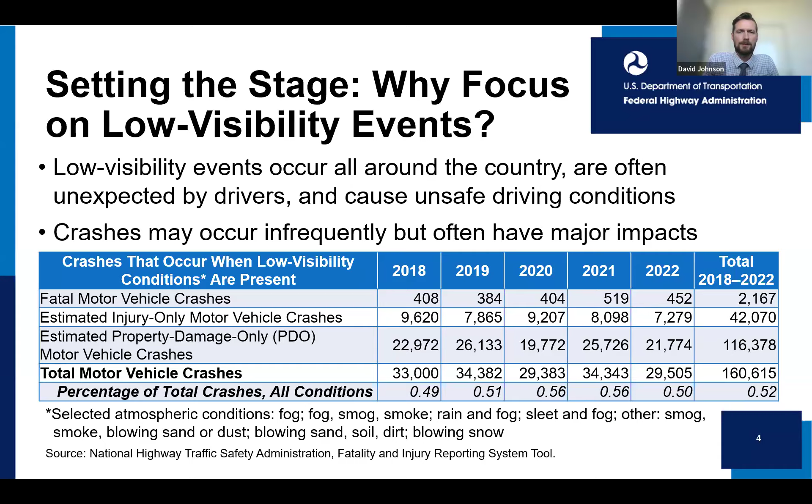Setting the stage, some of the recent high impact, low visibility events that I mentioned earlier: on May 1st, there was a localized dust storm in Illinois. This is an interesting case because it speaks to the different types of low visibility events, not just what you think of with fog or smog or smoke. In this case, it was a localized dust storm in Illinois, caused by farmland, freshly tilled and planted, in coordination with wind gusts of 35 to 45 miles an hour.

That dry tilled ground was picked up by high gusts of wind, and that blew dust across I-55, causing a 72 vehicle crash, which involved multiple fatalities and injuries. The National Weather Service has a webpage that discusses the atmospheric and meteorological aspects of that event, so if you're interested, you can take a look at that link.

Also, more recent was the October 23rd, 2023 super fog event in Louisiana. This was caused by a mixture of wildfire smoke and fog, calling it smog or super fog. This resulted in a 168 vehicle crash on I-55 with multiple fatalities and injuries. The National Weather Service also has an interesting webpage there if you want to take a look at some of the scientific atmospheric details of why the event occurred.

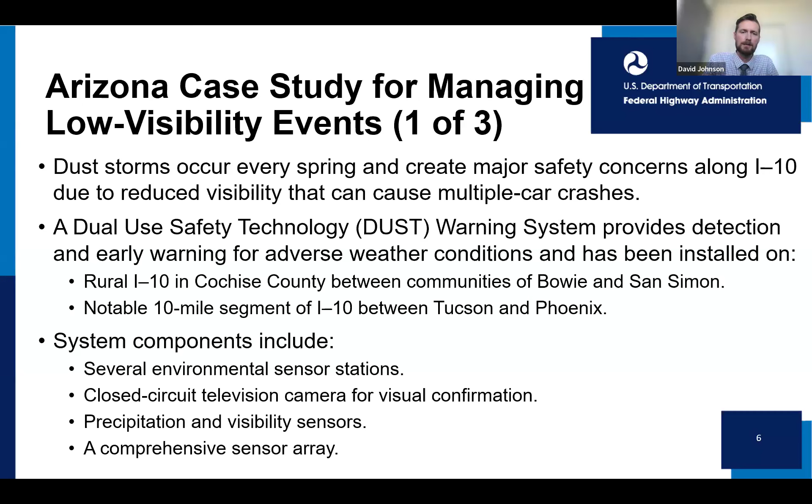The system was installed on I-10 between Bowie and San Simon, as well as a 10-mile segment of I-10 between Tucson and Phoenix. Some of the system components, which several of our speakers will also be talking about, include installation of environmental sensor stations, or ESS. They also use closed circuit television cameras for ground truthing and visual confirmation of the event, and installed precipitation and visibility sensors at that site as well. Next slide, please.

This is a little bit more detail, and you can kind of see some of the ITS and other technology advancements they use for this system. They've used programmable logic controllers that automatically trigger devices due to wind speed or minimum visibility threshold. This is an automatic system that will display dynamic message signs and messaging to the public so that they're aware that there's low visibility due to dust up ahead.

They also use highway advisory radio services that can be used to alert drivers if they're listening to the radio, with stored messages that they use. The sensors also send out email alerts to a certain group to alert highway ops, as well as law enforcement, of high winds and low visibility conditions.

And then there's also variable speed limit signs that are used, staggered through the 10-mile stretch, to help drivers slow down and be prepared for low visibility up ahead.

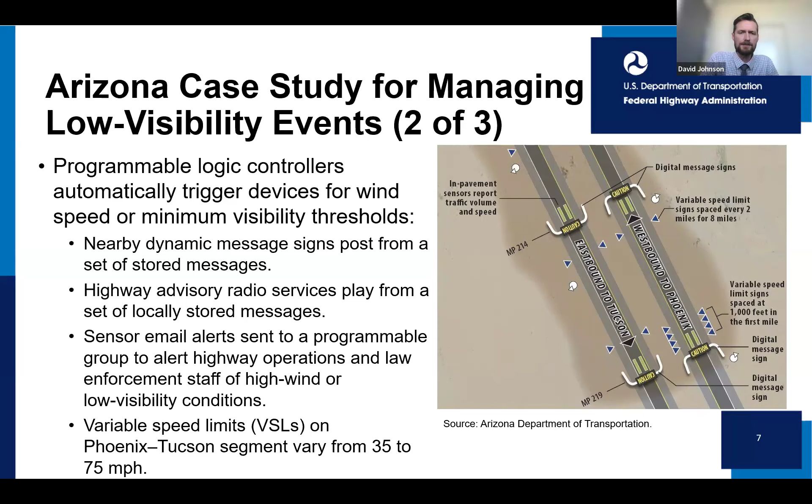Next slide, please. We do have a really good fact sheet on our webpage that goes into a lot more detail on this system. It's a really interesting piece. It was also highlighted in Public Roads, and there's been international attention to the dust detection system. So if you have any interest in something like this, take a look at our webpage at the link below.

Some of the challenges and lessons learned that Arizona DOT wanted to communicate was the initial calibration, as with any sort of sensors or ITS deployment, can be a bit of a challenge. So setting up trigger points for when parameters are triggered, such as with dynamic message signs, but also the atmospheric conditions that need to be triggered for VSL thresholds, as well as email notifications and alerts.

It was a challenge with meaningful review of weather, crash, and system performance data to validate the system, as well as providing things like benefit cost analysis. That's typically very challenging with these types of deployments because both weather events and crashes can be highly random.

And then also the focus on highway segments where there's recurring issues. These dust storms and low visibility events obviously don't fit into set boundaries. They can happen any place, anytime. So it's difficult to figure out exactly where on interstates or highways a system like this would need to be used. Obviously, you want to use data - you want to look at recurring crashes and intensities and frequencies when you decide to deploy something like this. But those are some of the challenges that Arizona pointed out in that fact sheet.

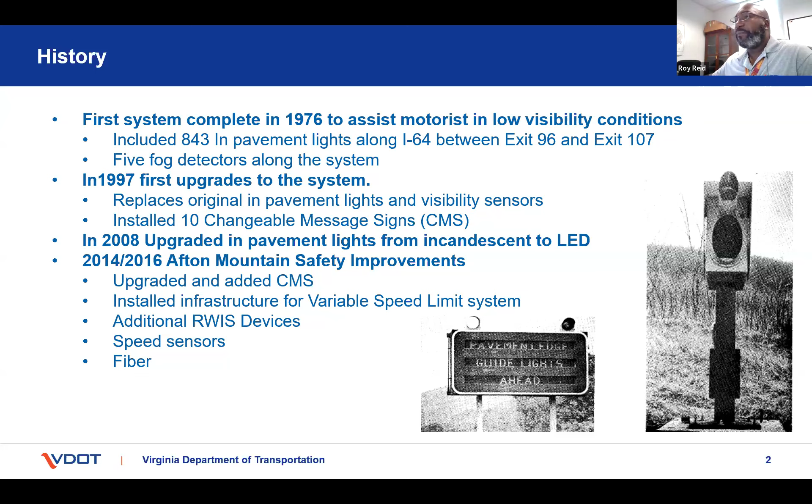So what we currently have out there, we have RWIS devices across Afton Mountain, at 8 different locations, along with 14 message signs, CMSs, that are dedicated to Afton Mountain messaging.

Let me back up a quick second. So where our RWIS devices or stations are,

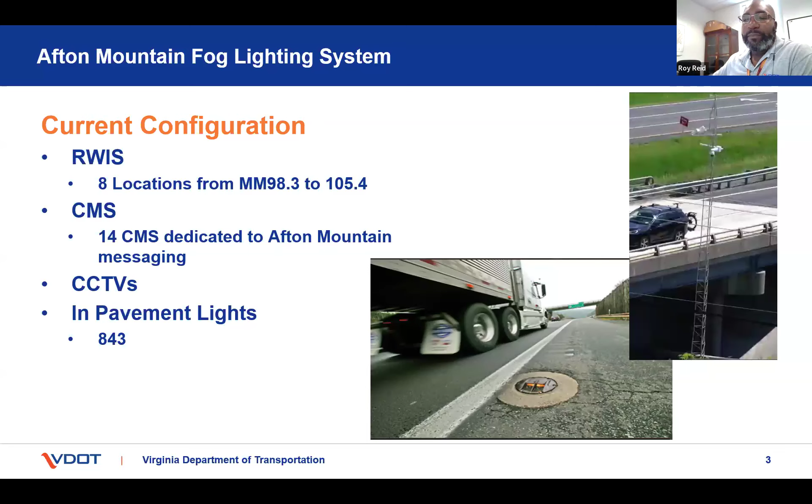This is basically to give you an idea, a view of what we have. So right now, this depicts some of our message signs, along with our camera locations, our weather sensor locations,

and also this is simulating a severe fog event. So if you were to dig into this and look at it, you would see our messaging for dense fog on the mountain, use caution on our feeder signs, and then our interstate signs, basically, it says dense fog, reduce speed.

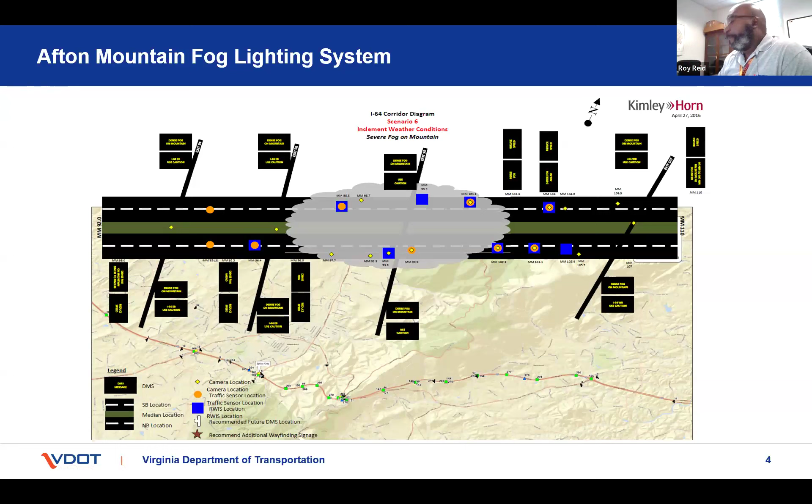So how do we utilize our system? Our RWIS devices on Afton Mountain communicate directly into the TOC. What will happen is as your visibility sensors are reading, getting their visibility, we reach certain thresholds and that will trigger an alert into the Traffic Operations Center.

The TOC operators will in turn take those alerts, and then they will launch an incident response plan based on the visibility level. So as you can see here, minor is 1,201 to 1,400 feet. And anything above 1,400 feet of visibility, we call that clear.

And then so with our minor, they activate just the lights, a response plan to activate the lights. And if fog conditions continue to degrade, then it would change based on the conditions.

So if it's between 500 and 1,200 feet visibility, then they'll do a moderate fog condition plan, or major if it's between 200 and 500, or severe if it's less than 200 feet of visibility.

One of the other things that we tend to deal with out here, I'll show you our matrix, is high winds on Afton Mountain. So we have common occurrences of winds that are consistently greater than 30 miles an hour. In those cases, we will post high winds on mountain, use caution.

And then freezing fog. We've had several occasions of fog, especially as we get into the winter months, October, November, where we'll have temperatures that are 30 degrees or less, and we also have fog conditions. So as you can see in this matrix, we would post a message that says black ice possible.

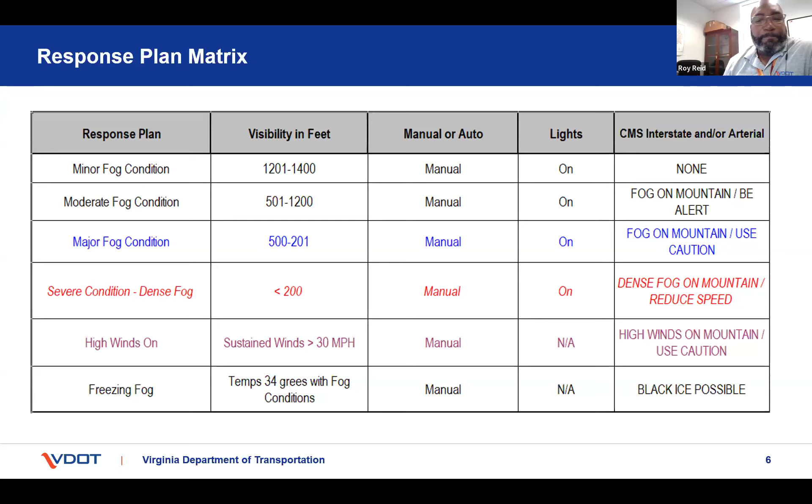But another thing that our operators would do for this is that they would in turn make notifications to our area headquarters, and so we would have people respond to the interstate and treat the roadway as necessary. So that is what I have to talk to you about on Afton Mountain.

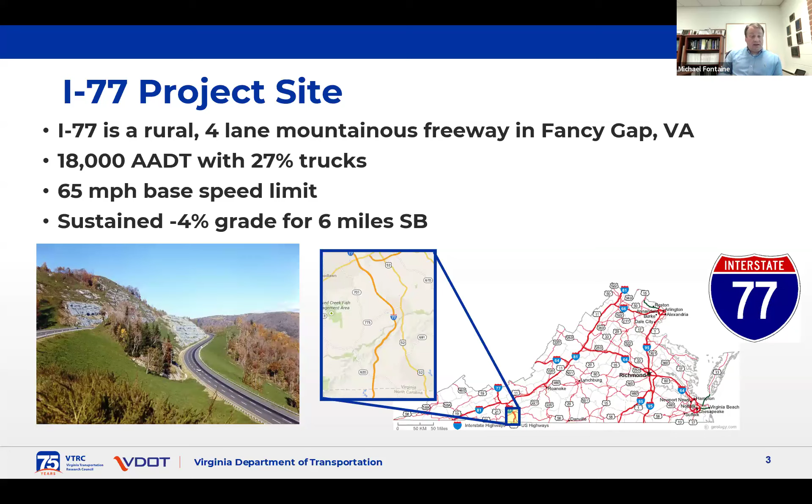On the left side of the slide, you can see a picture taken about 50 years ago when the road first opened up. The other thing you can notice is we're basically hugging the side of a mountain as we go through this corridor, and sometimes we have pretty significant differences in elevation between the northbound and southbound direction. So it's not strictly a case where both directions of travel are parallel to one another.

This corridor has had a lot of concerns for a long time where very frequent dense fog will come into the corridor and really impair visibility. This has been a long-standing problem, so we've had a lot of visibility sensors deployed out there for some time. In fact, when we looked at the historic average, somewhere in the first 15 miles of I-77 coming into Virginia has fog an average of the equivalent of 29 days a year. So we're talking about an area with a lot of fog, very predictable and recurring.

Even though fog doesn't always come on a schedule, we know it's going to happen in this location. Because of the fog combined with the high truck traffic and the steep downhill grade, we had a lot of problems with chain reaction rear end crashes during these very severe visibility events.

Probably the most recent one that generated a lot of concern, leading to the project I'm talking about today, was an Easter Sunday crash in 2013. That was a 95-car crash event with 3 fatalities. When you talk to the troopers that responded, they said that if you were standing at the back of the tractor trailer involved in the crash, you could not see its cab. The fog was so thick.

In the meantime, our VDOT folks in the Traffic Operations Center were able to look at the speeds. People were still going 70 miles an hour on the highway with that kind of impaired visibility.

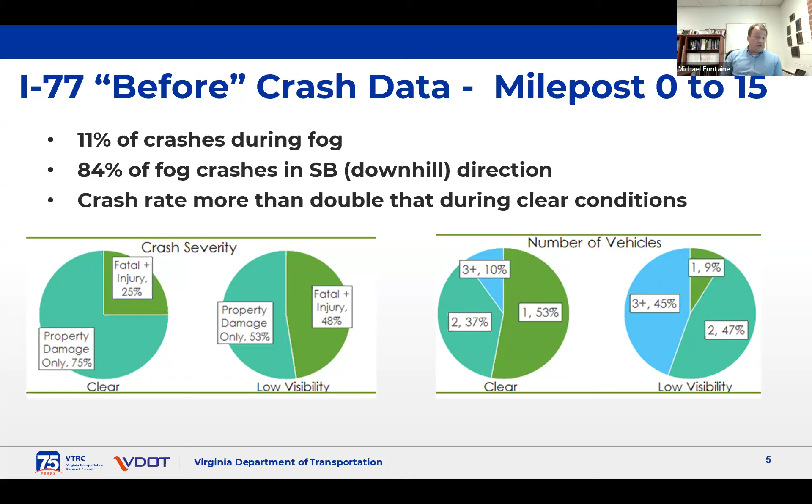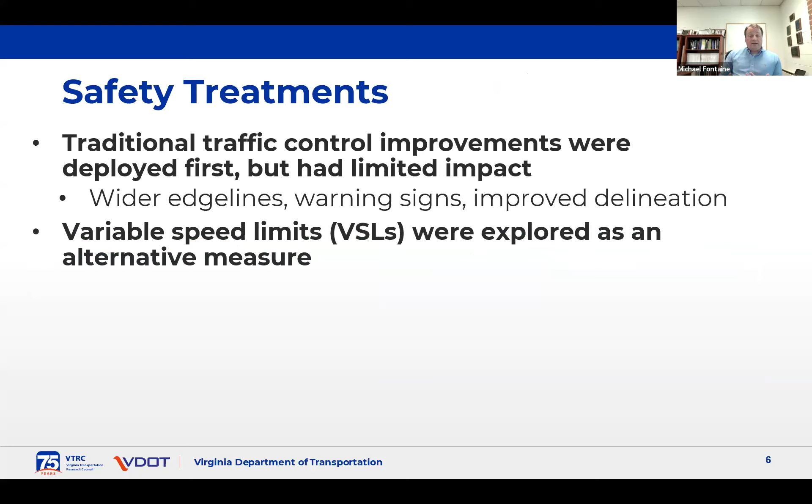So because of all these problems, VDOT initially tried traditional traffic control improvements to deal with this. We tried wider edge lines, larger warning signs, improved delineation, and despite all that, we weren't really able to move the needle much in terms of safety. Because of that, VDOT became interested in looking at variable speed limits as an alternative means to control speeds in the corridor and hopefully improve safety.

Just a few logistical things we need to do: normally when you're setting a speed limit, you do a speed study that's signed and sealed by the district traffic engineer doing the study. In our case, since we're not setting a specific speed limit, we're defining an algorithm for changing the speed. That algorithm has to be signed and sealed for each deployment of variable speed limits in this state, with the district traffic engineer approving the logic being used to change these speed limits.

In Virginia, our variable speed limits can be regulatory or advisory, so we do have that option. One thing important to mention is that right now in Virginia, we can only use automated speed enforcement in work zones and school zones, so it is not a tool for us on a regular section of freeway. The variable speed limits we put in for this fog system had to be manually enforced traditionally; we could not rely on automated speed enforcement here.

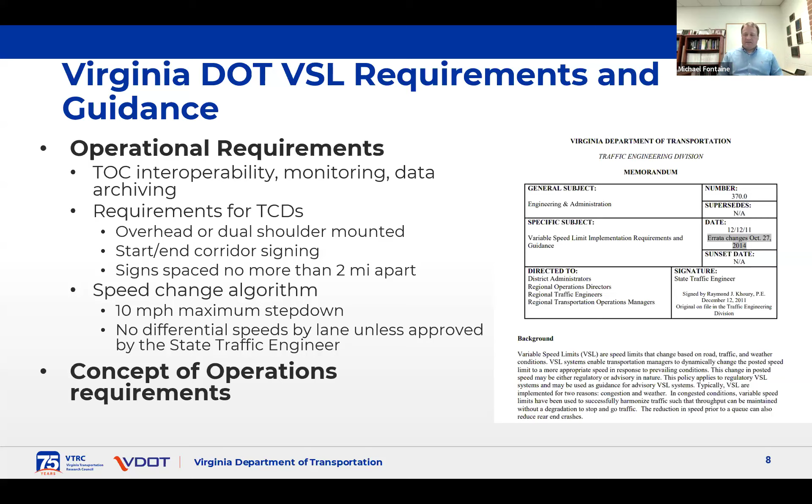The speed limits apply across, it's the same speed limit across all lanes. We do not have a different speed limit for the left lane versus the right lane or anything like that. So right now, everything is the same speed limit across all lanes.

About the system we deployed on I-77: the total system cost about $7.5 million, and it was activated in October 2016. That $7.5 million also included cost to upgrade power and communications. Since we were in a very rural area, there was a lot of power upgrades required to support the system. 13 dynamic message signs were installed along the corridor.

We had 36 full matrix variable speed limit signs, which is that picture on the right side there, which were 60 by 60. We had 8 VSL cutout signs where only the speed limit changed, shown on the left. We had 25 CCTV cameras, 22 Wavetronix side-fire radar sensors, 14 Vaisala visibility sensors, shown at the bottom. The signs were spaced about a mile apart over the course of this corridor.

One thing folks may be interested in: there's some debate about what color these LED or changeable signs should be in fog and what color transmits best through fog. Before this deployment, we did a study with the Virginia Tech Transportation Institute, which has a closed course facility where they can create fog when conditions are right. We compared driver legibility and visibility using these actual signs with both amber and white light to see which was better.

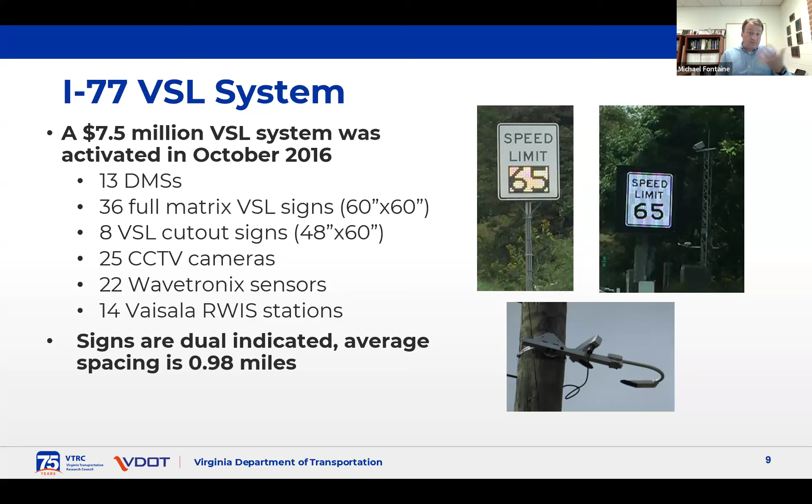One thing to point out here too is going northbound, which is the uphill direction, we did have a truck climbing lane for a portion of the corridor, so that while it was very steep in the downhill direction, we were able to bring the trucks out of the main stream of traffic going uphill in the other direction.

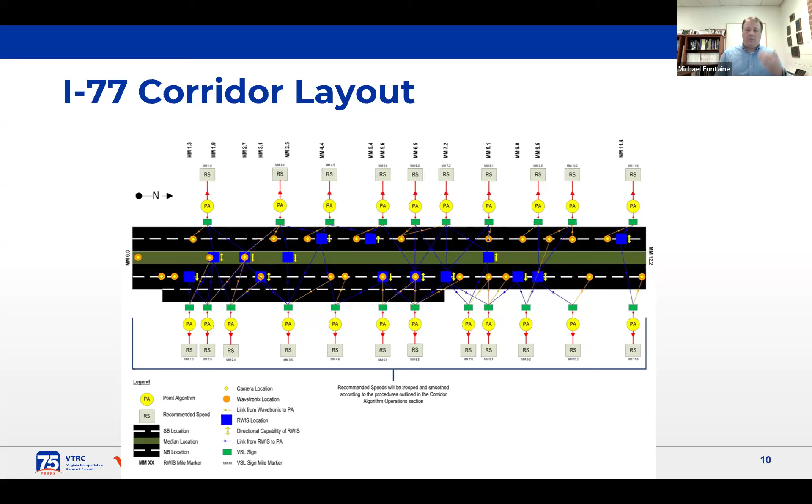In terms of developing the control algorithm, because this area had been fog prone for quite some time, we had a lot of RWIS stations that gave us visibility data in feet. Because of that, we had a good track record of what visibility was like during fog events. Our starting point for the control algorithm was essentially back calculating the stopping sight distance equation that many of us learned about in highway design or roadway design work.

The idea here is that we initially thought about, okay, what if we set the speed limit as a function of the available visibility based off of stopping sight distance?

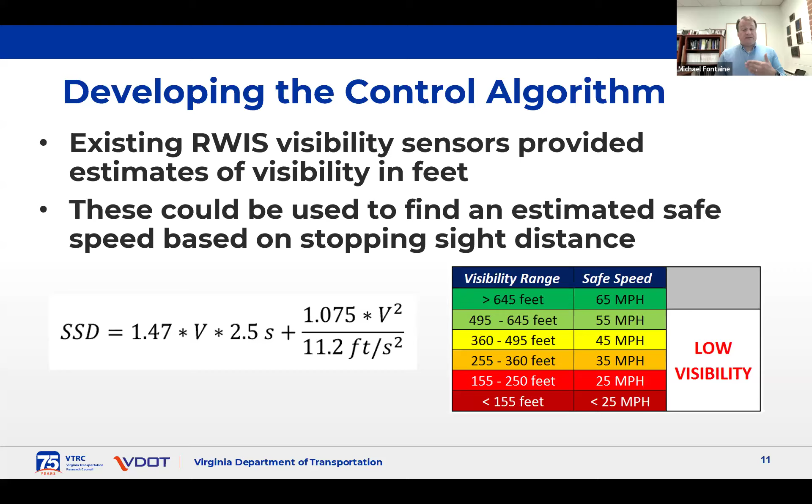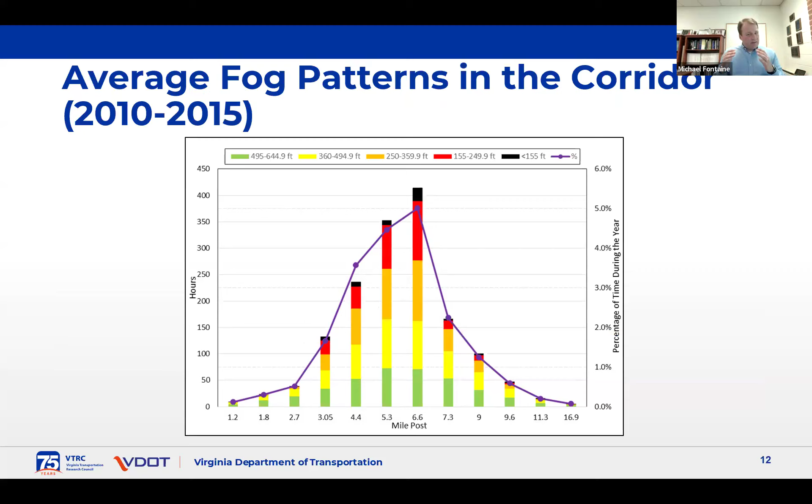We went and looked at patterns of fog within the corridor. Going from North Carolina on the left into the state on the right, there was an area where we had much more dense fog that tended to occur. We could view some patterns here where it wasn't quite as predictable as what Roy mentioned on Afton Mountain, where it was always at the top of the mountain, but there was a certain zone where the fog was more likely to occur.

What we found is people were driving a lot faster than that safe stopping sight distance based speed, sometimes more than 20 miles an hour faster than what would have been safe. So when we created the algorithm, we were concerned that if we strictly adopted this stopping sight distance interpretation, we might actually make safety worse because we could increase speed variance, with some people strictly complying and others driving the way they've always driven. That differential in speed could create a lot of problems, especially in limited visibility.

So instead, we split the difference between the two. We looked at what people were driving before the system went in, and we looked at the stopping sight distance safe speed, and picked something intermediate to try to encourage people to reduce their speeds through the corridor while still giving them something they'd perceive as a reasonable speed they would comply with.

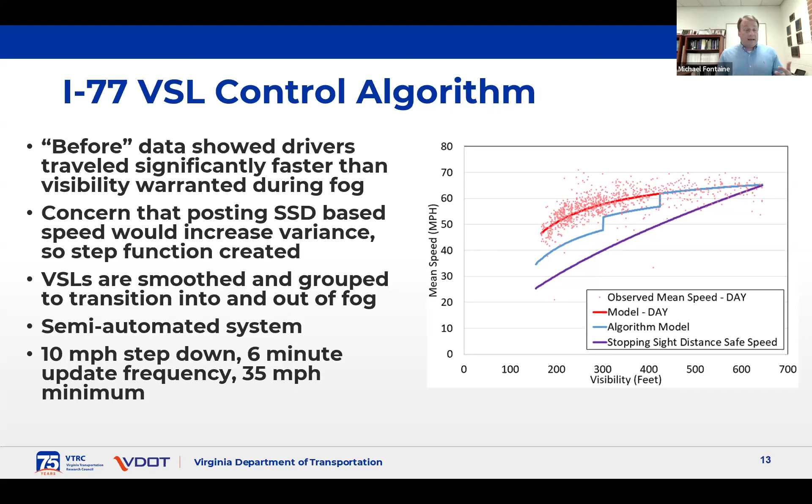One important thing here is that police officers obviously don't want to be pulled over on the side of the road in dense fog pulling people over. So there wasn't a lot of active enforcement during fog events, out of concern for officer safety, but the speeds could be used afterward if there was a crash to write tickets or make assessments.

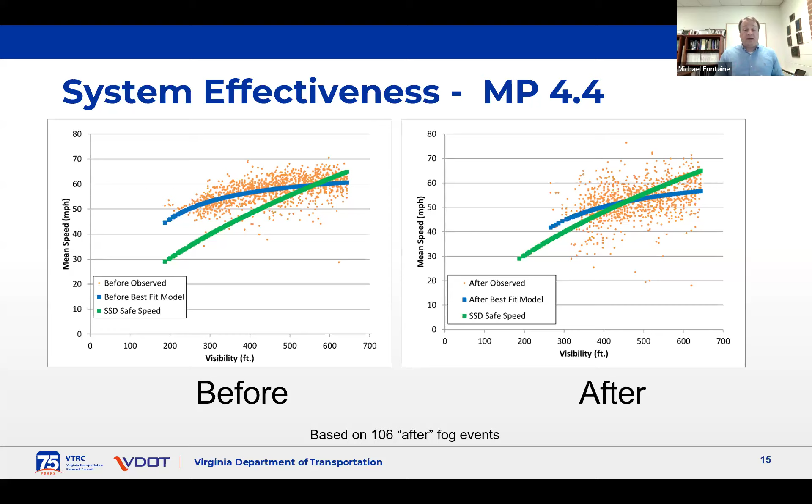Since we probably have a lot of engineers on this call, I'll mention the data on the left is 15-minute data, while the data on the right is 6-minute data. That's why it looks a little noisier and more spread out - it has nothing to do with increased variability in speeds, it's just that data gets smoothed out the more you aggregate it. But we have seen speeds come down, and when we look at the speed reductions by visibility, we've seen on average about a 5 to 6 mile per hour reduction in average speeds once the variable speed limit system went in, across the board.

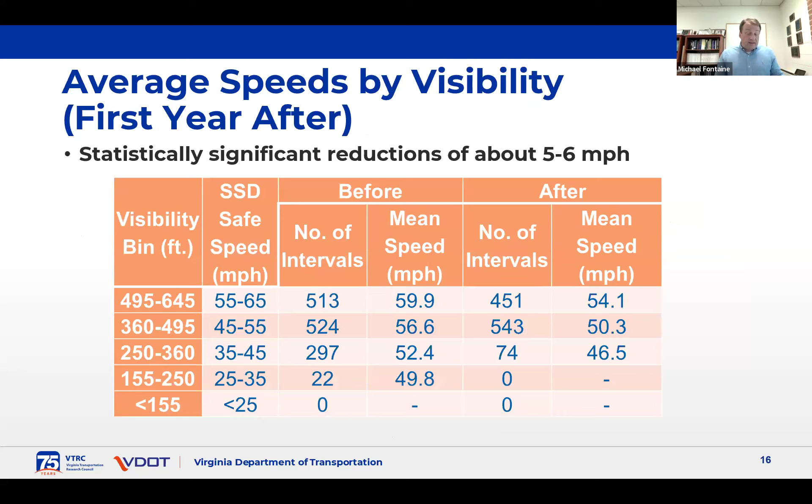So drivers were reacting, they were reducing their speeds across the corridor. Now, what's particularly exciting to us is we looked at the safety on the corridor for 3 years before the variable speed limit system went in, and then 3 years after it was activated. Luckily, since this was turned on in 2016, the 3 years after did not include any pandemic data, so that's not influencing things.

What's particularly dramatic to us is that southbound direction, where we really had the safety problem - we went from 34 crashes in the 3 years before we turned the system on to only 2 in the 3 years afterwards. So we had a very dramatic improvement, especially in that downhill southbound direction.

For those of you into safety analysis, we did do an empirical Bayes crash modification factor development. We were able to get very significant, statistically significant crash modification factors, if you're into that.

One thing that was also interesting is even though the variable speed limits were only activated during fog conditions, we also saw some evidence that overall severity improved on the corridor. If you drive the corridor now with all the variable speed limit signs and big DMSs, clearly there's something different about this corridor than the average interstate. We've seen some evidence that there might be around a 10% reduction in fatal and injury crashes, even in non-fog conditions, because of this infrastructure that we put in.

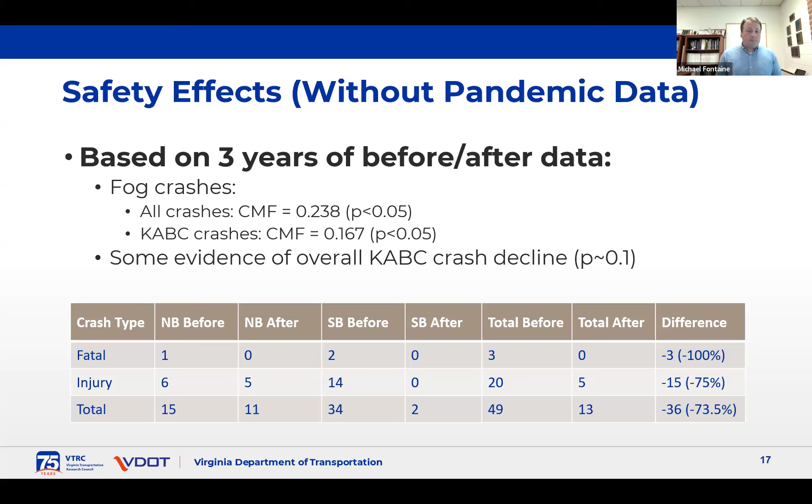Just to summarize, we've seen the mean speeds have gone down about 5 to 6 miles an hour. Fog crashes have dropped by over 75%.

One thing I would offer as a best practice when looking at compliance: what we saw is even though we were slowly stepping down speeds going into the fog, drivers tended not to decelerate too much until they actually saw the fog and were in it. That implies for future variable speed limit systems looking at fog, where you've got a predictable pattern, you should space your signs a little closer together going into those fog transition zones so you can more rapidly drop the speed limits.

But generally, drivers were reducing speeds, though they wanted some visual confirmation of why they needed to reduce speed. So think about that transition in and out. Using the DMSs so drivers understand why you're reducing the speeds was very important, I think, to the overall effectiveness of the system.

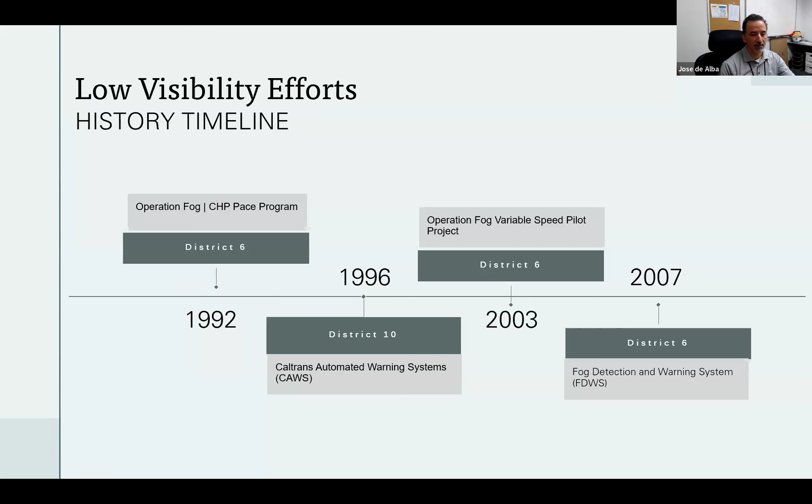When the project was initiated after this first incident in November, we were very much under the gun and had a sense of urgency to make something happen. And when we had another incident a few months later, it really put the pressure on us to deliver a system to help mitigate incidents out there.

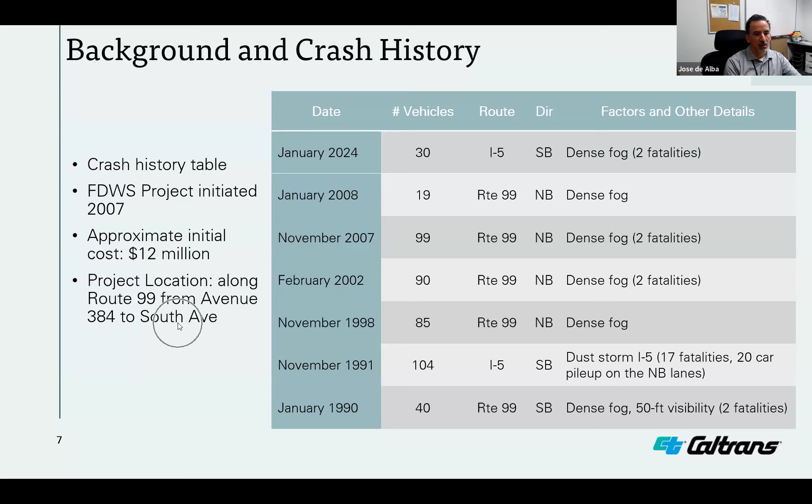I won't show too many pictures, but most of you already know what these major pileups look like. This one happens to be on Route 99, again just south of Fresno. This particular one was back in 2002, where 90 vehicles were involved and 2 fatalities.

I do consider this one an outlier for Interstate 5 in this particular region, because most of the incidents are related to wind speeds out in I-5. Winds can reach upwards of 80 miles per hour in this region of the valley, which wreaks havoc for RVs, semi-trucks, and camper trailers crossing I-5 here in this region.

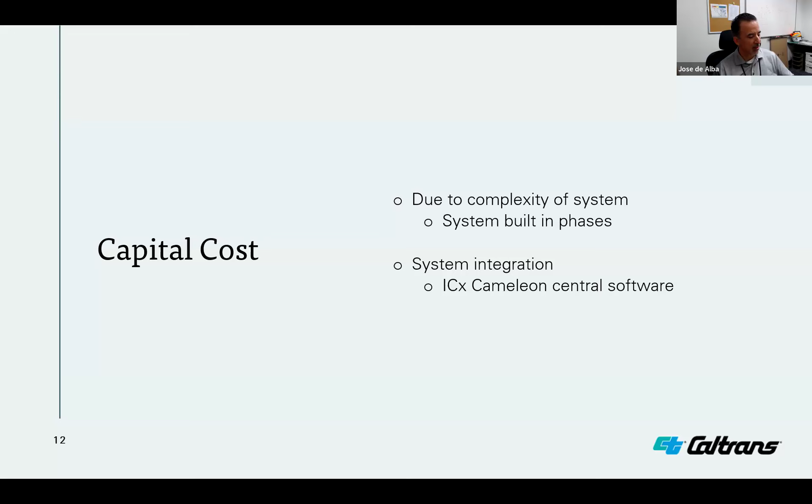ICX was able to deliver what we needed, but through additional contracts, we also requested additional changes and enhancements. The Traffic Management Center software was also updated with configuration changes over several years, improving the system.

So the theory of operation: advanced notice of stopped vehicles ahead. This gives motorists situational awareness. It allows motorists to identify if there's a stopped vehicle ahead or a vehicle traveling much slower than freeway speeds.

This essentially allows motorists time to make decisions. Do they take the next exit and exit the state highway system? Do they slow down, basically adjust their behavior based on the information being provided?

It is fully autonomous, and the autonomous system is needed to make the quickest response times possible, essentially removing the human factor, which sometimes can cause delays.

It also is able to do single lane isolation, so identify if a vehicle is stopped on the number 1 lane, the number 2 lane, or number 3 lane, and also determine speeds, which is unique and requires an additional level of complexity for the PLCs to handle, not only to report, but to take action on those conditions.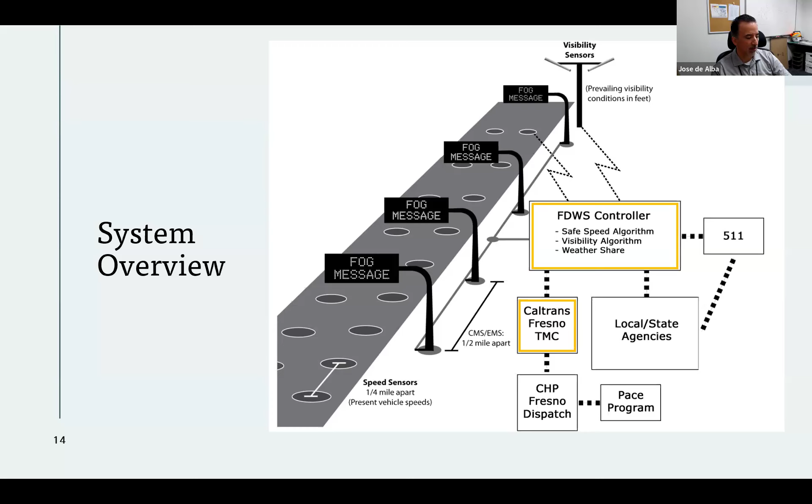But the system can be overridden by the central system in the traffic management center. Given certain conditions, we have done that and can do that at any time.

So the warning message logic—this logic is actually programmed into the PLCs out in the field and into the central software system. It has 9 scenarios programmed, based on visibility criteria, speed criteria, and whether CHP, the California Highway Patrol, is pacing or not. I won't go too deep into that given my time constraint.

This is basically a snapshot of our central control system. It requires multiple detail pages to communicate real-time status to our operators so they can monitor conditions in the field. Operators in the traffic management centers typically have 3 dedicated monitors just for this system, so they can spread it out and get a bird's eye view of the entire system. I'll go into a bit more detail on this particular snapshot.

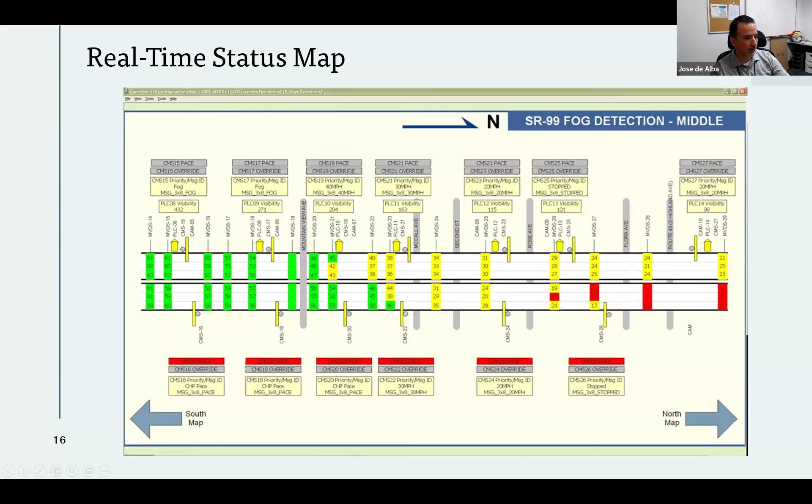I'm not sure why, but these signs should actually be on at the moment—I'm thinking this snapshot was taken before the signs were turned on. Based on the logic table I showed earlier, you'd have a sign saying whatever the condition is up ahead, like reduce your speed to 20 miles per hour, or whatever the case may be.

Operation and maintenance, this is basically the fun part, a lot of what I manage in my current position. The system has been in use for 15 years, and every fog season we have pre, during, and post activities in preparation for each season.

We have a dedicated team of engineers, electrician staff, and admin staff. Given the age of the system, batteries are being replaced yearly, and components are failing and becoming obsolete.

We've basically monitored the estimated staff time over the years, and on average, depending on what's going on with the system, it could be anywhere from 600 to 1,000 hours for operation, maintenance, configuration, and the pre-checks every year. So that is quite a bit of time.

If a system is failing, folks have to troubleshoot it, replace it, recalibrate the system, and get it ready for the upcoming fog season.